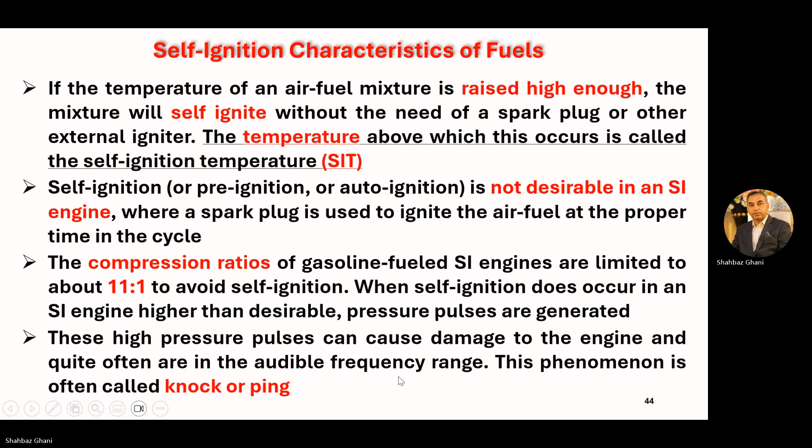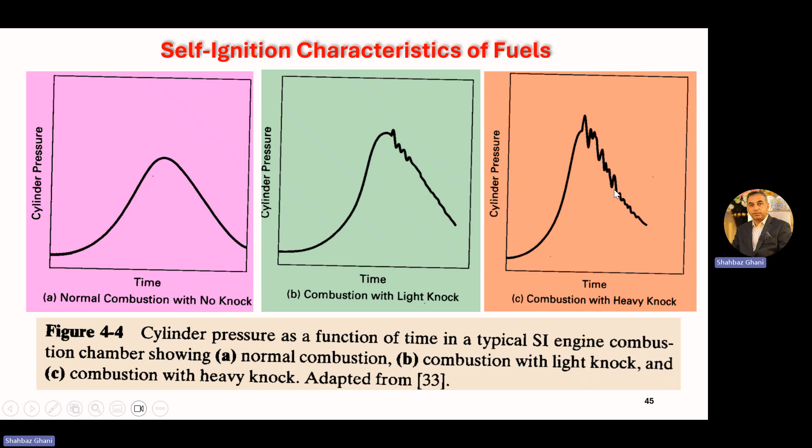Now in the third case, when we have a heavy knock, when we reach the peak pressure, there is quite a huge self-ignition there, and we have pressure pulse generation, and we have a high knock in the cylinder. These are in the audible range, so we can hear a different kind of noise from an engine.

Now, self-ignition characteristics of a fuel. If the temperature of a fuel is raised above the self-ignition temperature, the fuel will spontaneously ignite after a short ignition delay time. The higher above the self-ignition temperature the fuel is heated, the shorter will be the ignition delay. Ignition delay is generally on the order of thousandths of a second.

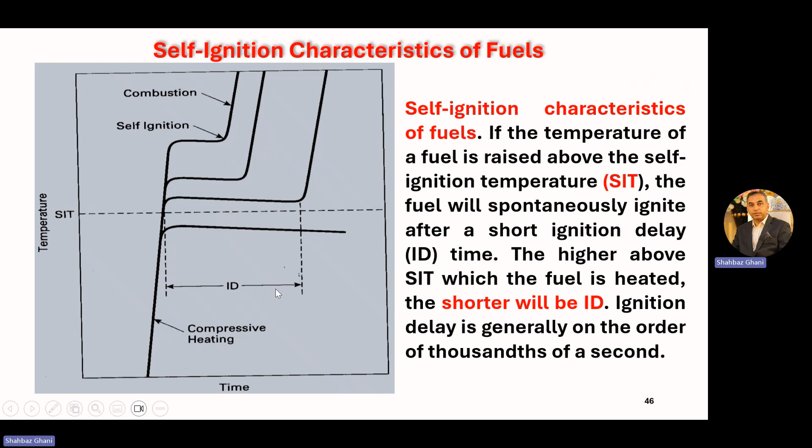Let's see this. We have time here, this is temperature, and this is the self-ignition temperature. Now we have a compression stroke, we have compressive heating here, and when it passes the self-ignition temperature, we have an ignition delay, and then we have combustion. So this is the ignition delay.

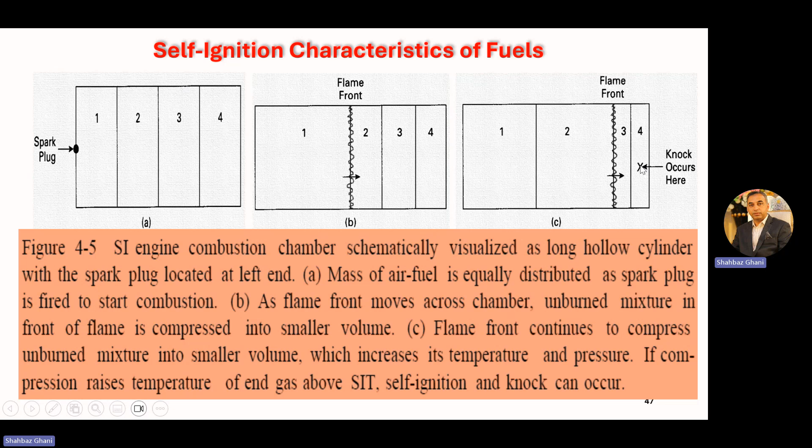So here we have air fuel mixture, air fuel mixture, air fuel mixture. This is burned, and this will now burn this portion, with pressure and temperature exerting in this direction. Now more area, more temperature, more pressure, more force exerting on this compressed air fuel mixture. And when the temperature of this region reaches above the self-ignition temperature, we have self-ignition here and knock occurs in this region.

That was the self-ignition, and there will be some ignition delay, which will be in thousandths of a second.

Now, octane number and engine knock. Octane number is usually for gasoline fuels. Remember this: the fuel property that describes how well a fuel will or will not self-ignite is called the octane number, or just octane. This is a numerical scale generated by comparing the self-ignition characteristics of the fuel to that of a standard fuel in a specific test engine at specific operating conditions.

So this number is not generally given; it is numerically calculated under specific conditions, specific operating conditions, and a specific test bench with specific standard fuels. Then we give this octane rating, the octane number. This is a numerical scale generated by comparing the self-ignition characteristic of the fuel to that of standard fuels in a specific test engine at specific operating conditions.

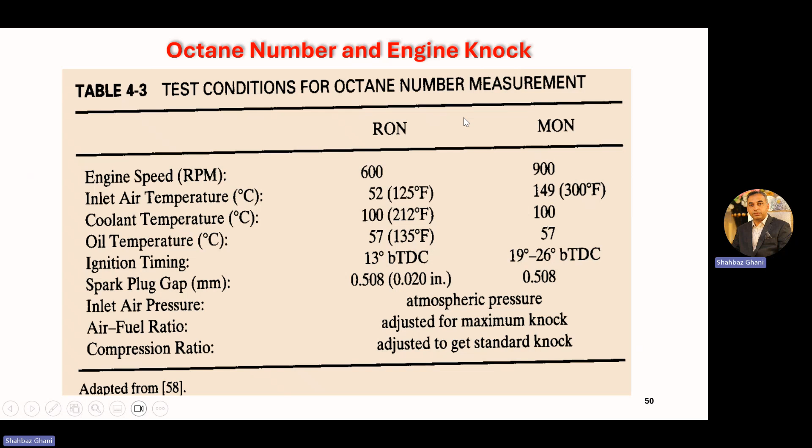Let's see the test procedure to find the octane number of a fuel. The test engine is run at the specified conditions shown in the last slide, using the fuel being tested. We take an unknown fuel, run it under specified conditions, and the compression ratio is adjusted until a standard level of knock is experienced.

At some point we achieve a standard level of knock with this compression ratio adjusted. Then this test fuel is replaced with a mixture of two standard fuels: isooctane and heptane.

The intake system of the engine is designed such that the blend of the two standard fuels can be varied to any percentage, from all isooctane to all N-heptane.

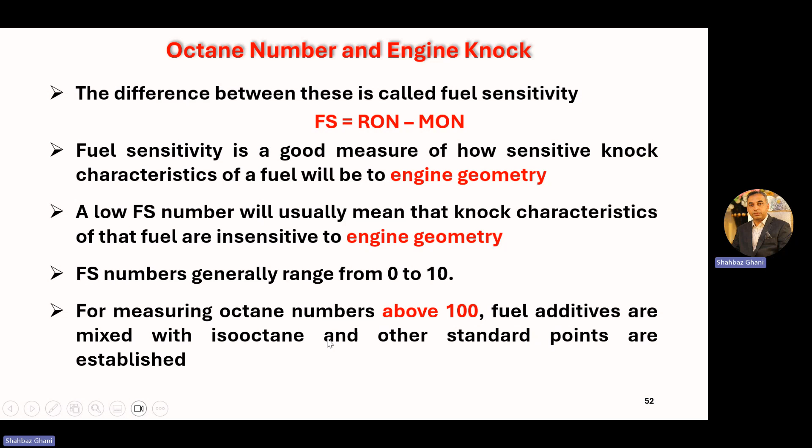Fuel sensitivity generally ranges from 0 to 10. For measuring octane numbers above 100, we have a range from 0 to 100, but to measure octane numbers above 100, fuel additives are mixed with isooctane and other standard points are established.

To obtain an octane number more than 100, a commonly used additive for many years to raise the octane number of fuel was tetraethyl lead, TEL.

Common octane number anti-knock index for gasoline fuel used in automobiles ranges from 87 to 95, with higher values available for special high performance and racing engines, whereas anti-knock index equals RON plus MON divided by 2. Reciprocating SI aircraft engines usually use low lead fuels with octane number in the range of 85 to 100.

If several fuels of known octane number are mixed, a good approximation of the mixture octane number is: octane number mixed equals percentage of A times fuel A's octane number, plus percentage of B times octane number B, plus percentage of C times octane number C, where percent is percent by volume.

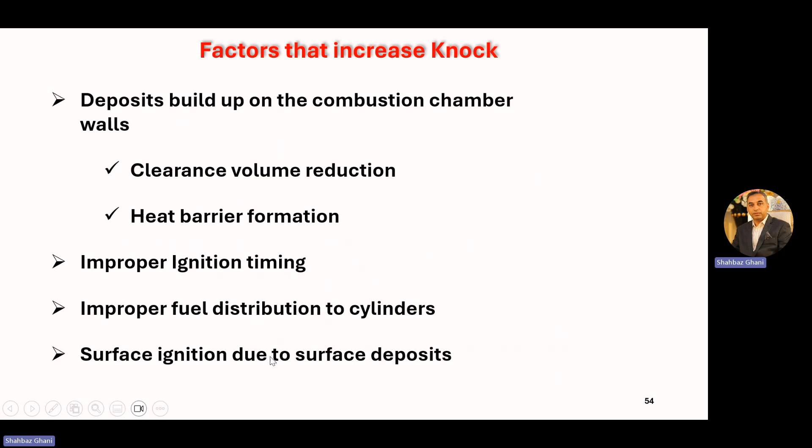The factors that increase knock include deposits building up on the combustion chamber walls during combustion, clearance volume reduction, heat barrier formation, improper ignition timing, improper fuel distribution to the cylinder, and surface ignition due to surface deposits. All these factors lead to increased knock.

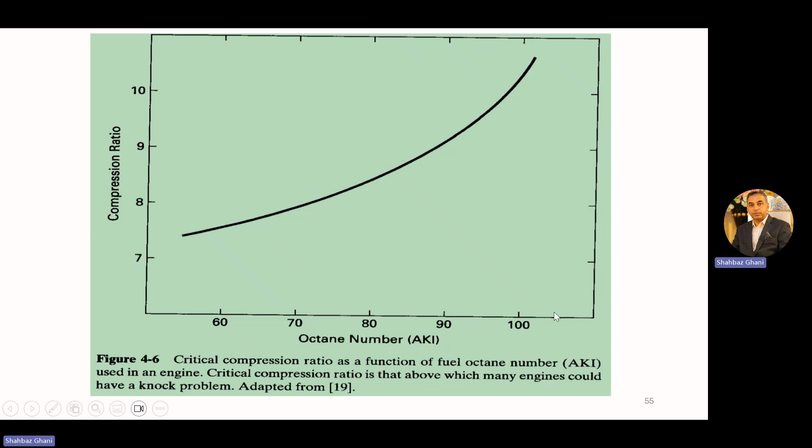Example 4-5: a gasoline type fuel is generated by blending 15% by weight of butene-1, 70% triptane, and 15% isodecane. Determine the anti-knock index, AKI. The anti-knock index is increased if 0.4 grams of tetraethyl lead is added per liter of fuel, and determine if the fuel is sensitive to combustion chamber geometry.

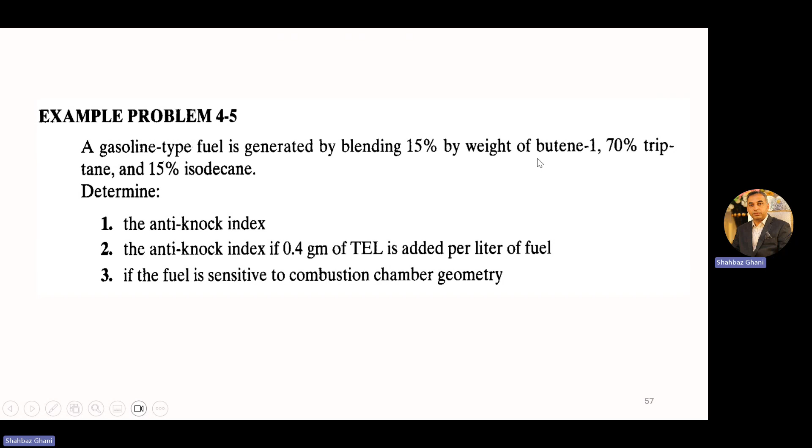Using data from table A2 and the given equation, let's find the research octane number. We know the compression ratio, the percentages of these fuels, and the molecular weights of these fuels.

0.15 times 99 plus 0.70 times 112 plus 0.15 times 113... the research octane number comes out to be 110.2. For motor octane number we get 0.15 times 80 plus 0.70 from the table, giving us a value of 96.5. So the anti-knock index equals MON plus RON divided by 2, which gives an anti-knock index of 103.

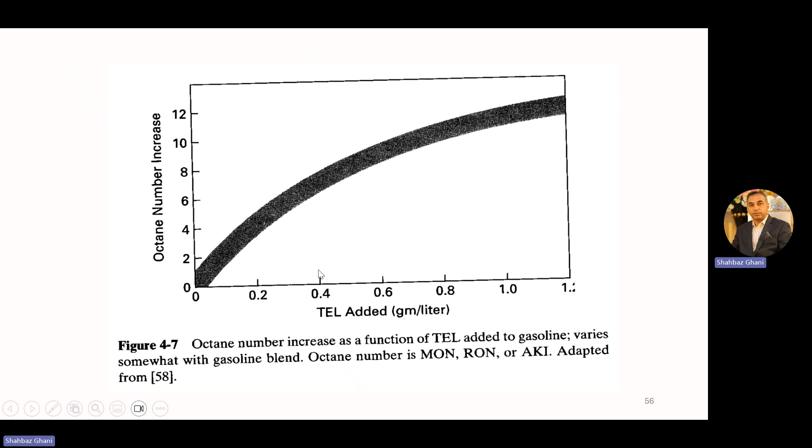Now if we use 0.4 grams per liter, from this graph it will increase the octane number rating by about 7. So 103 plus 7 gives an anti-knock index of 110. Now fuel sensitivity equals RON minus MON, so 110.2 minus 96.5 gives us 13.7, which is more than the range of 0 to 10.

This is a fairly large number, which suggests that the knock characteristics of this fuel are very sensitive to combustion chamber geometry.

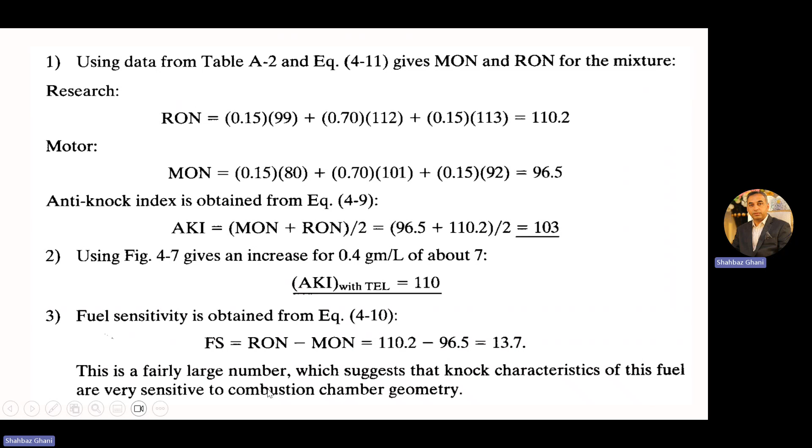Now let's talk about diesel fuel. Diesel oil or fuel oil is obtained over a large range of molecular weights and physical properties. Various methods are used to classify it, some using numerical scales and some designating it for various uses. The greater the refining done on a sample of fuel, the lower its molecular weight, the lower its viscosity, and the greater its cost.

Numerical scales usually range from 1 to 5 or 6, with subcategories using alphabetical letters like A1, 2D, etc. The lowest numbers have the lowest molecular weight and lowest viscosity. Higher numbered fuels are used in residential heating units and industrial furnaces. Fuel with the largest numbers are very viscous and can only be used in large, massive heating units. Each classification has acceptable limits set on various physical properties such as viscosity, flash point, pour point, cetane number, sulfur content, etc.

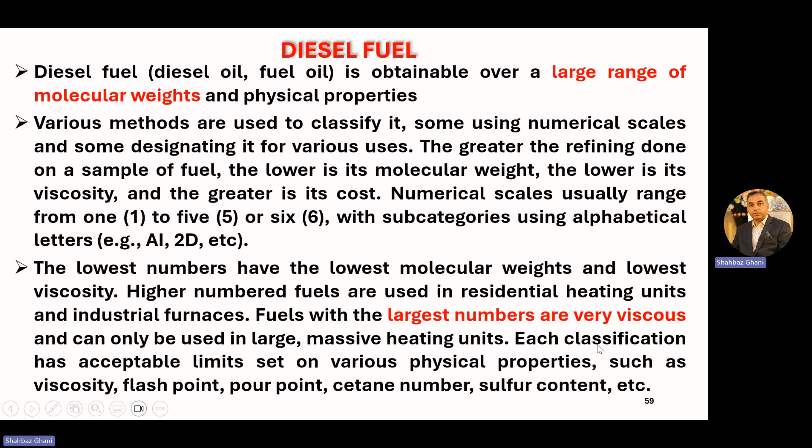Light diesel fuel and heavy diesel fuel are two categories of diesel fuel. Light diesel fuel has a molecular weight of about 170 and can be approximated by the chemical formula C12.3H22.2. We can see from table A2 that light diesel fuel will be less viscous and easier to pump, will generally inject into smaller droplets, and will be more costly.

Because the molecular weight is less. Heavy diesel fuel has a molecular weight of about 200 and can be approximated as C14.6H24.8. Heavy diesel fuel can generally be used in larger or heavier engines with higher injection pressure and heated intake systems. Often an automobile or light truck can use less costly, heavier fuel in summer, but must change to lighter, less viscous fuel in cold weather because of cold starting and fuel line pumping problems.

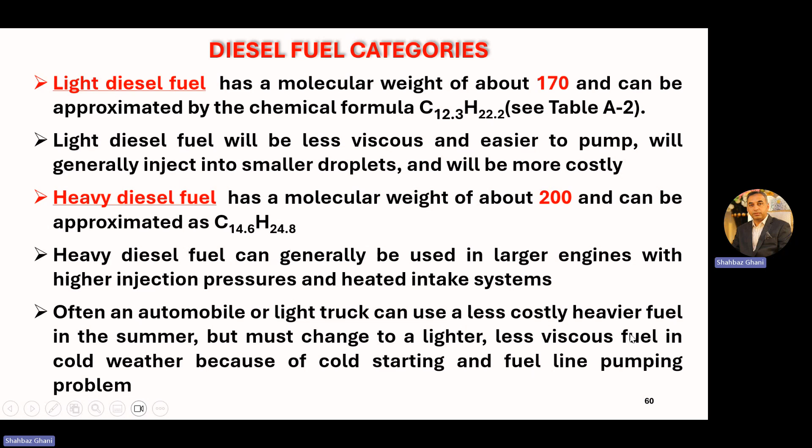So remember this: if you have an automobile or light truck, you can use less costly, heavier fuel in summer. But in winter, we have to switch to the lighter and less viscous fuel because of cold starting and fuel line pumping problems.

Cetane number. In gasoline, we have octane number, but in diesel fuel, we have cetane number. In compression ignition (CI) engines, self-ignition of the air-fuel mixture is a necessity. So we don't have a spark plug in a diesel engine, and we don't have any other ignition mechanism. It is a compression ignition engine in which self-ignition of the air-fuel mixture is a must.

The correct fuel must be chosen which will self-ignite at the precise proper time in the engine cycle. It is therefore necessary to have knowledge and control of the ignition delay time of the fuel. We must know about the properties and characteristics of the fuel and its ignition delay time. The property that quantifies this is called the cetane number.

The larger the cetane number, the shorter the ignition delay. So a diesel fuel having a larger cetane value will have a shorter ignition delay, and the fuel will self-ignite quicker in the combustion chamber environment. A low cetane number means the fuel will have a longer ignition delay.

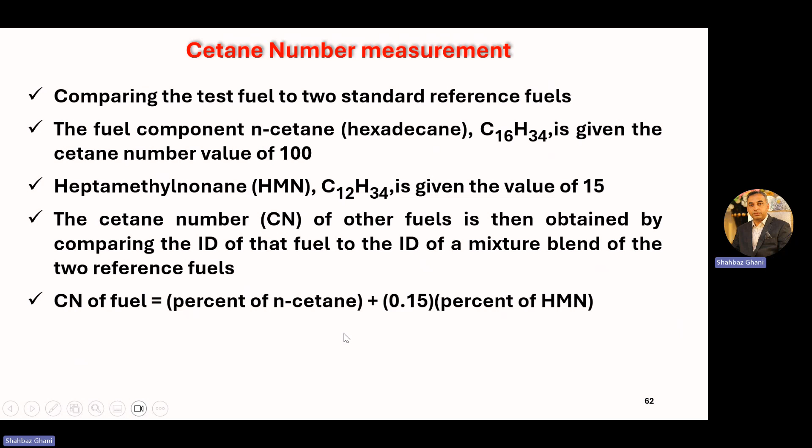The cetane number of a fuel is equal to the percent of N-cetane plus 0.15 times the percent of heptamethylnonane. This is how we can find the cetane number of an unknown fuel.

Cetane number measurement procedure: a special CI test engine, as we have in gasoline with special test conditions, is used. This special CI test engine has the capability of having the compression ratio change as it operates, just as in the gasoline engine where we can change the compression ratio from 3 to 30.

The fuel being rated is injected into the engine cylinder late in the compression stroke, at 13 degrees before TDC. The compression ratio is then varied until combustion starts at TDC, giving an ignition delay of 13 degrees of engine rotation.

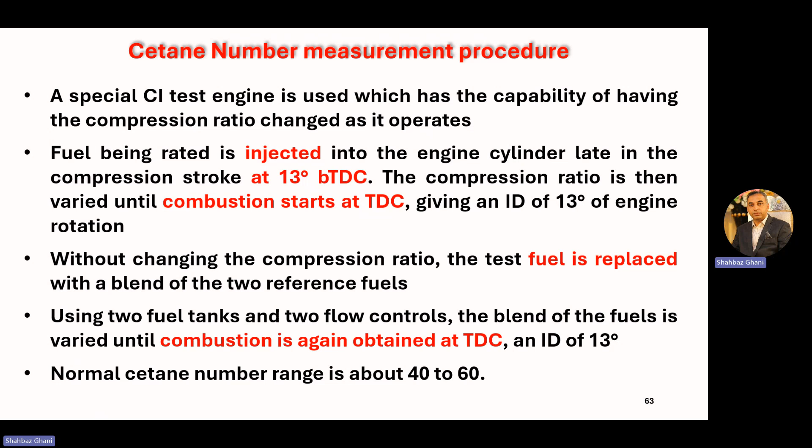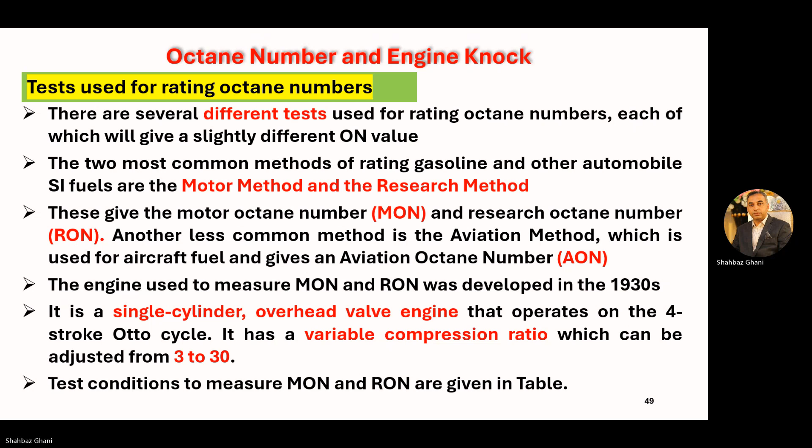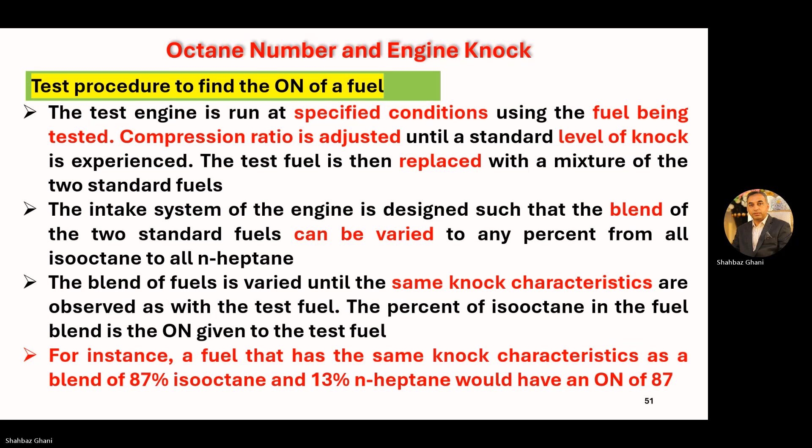Without changing the compression ratio, the test fuel is replaced with a blend of the two reference fuels. Using two fuel tanks and two flow controls, the blend is varied until combustion is again obtained at TDC with an ignition delay of 13 degrees. The normal cetane number range is about 40 to 60, whereas the octane range was 0 to 100.

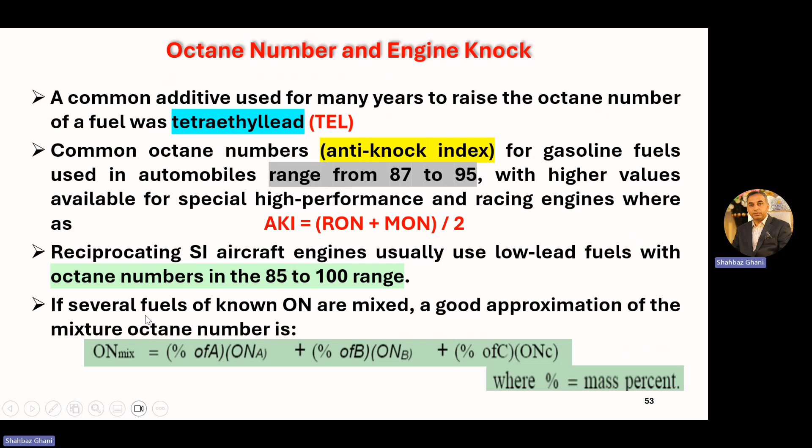Octane range was 87 to 95. But in cetane, we have a range of 40 to 60.

Let's find now a few words regarding alternate fuels. We have studied the gasoline fuels, we have studied the diesel fuel. Now people are working on alternate fuels, alternate sources of energy. The reasons to find alternate fuels are: crude oil and petroleum products will become very scarce and costly to find and produce, emission problems, and foreign trade deficits. So these are the three main reasons to go for alternate fuels.

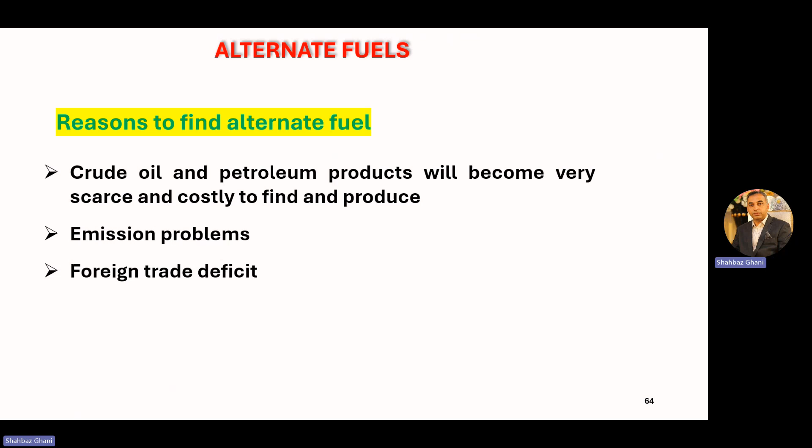Limitations to using alternate fuels: modified engines which were originally designed for gasoline or diesel fuel. Alternate fuels are very costly at present, and there is a lack of distribution points. So these are the limitations in using alternate fuels.

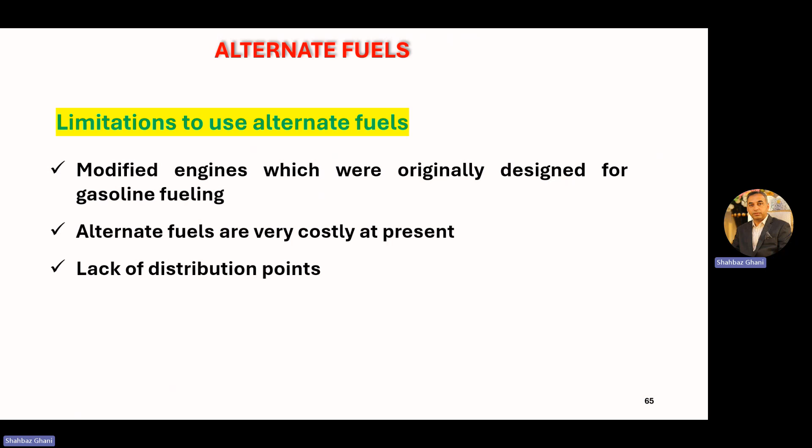Some alternate fuels are alcohols - methanol, ethanol - hydrogen, and natural gas, methane.

The advantages of alcohol as a fuel include: it can be obtained from a number of sources, both natural and manufactured, and is a high octane fuel with an anti-knock index number of over 100 due to high flame speed. So alcohol fuel has a high octane number and anti-knock index above 100. Engines using high octane fuel can run more efficiently by using higher compression ratios, so generally there is less overall emission when compared with gasoline.

When burned, it forms more moles of exhaust, which gives higher pressure and more power in the expansion stroke. It has high evaporative cooling (HFG), which results in a cooler intake process and compression stroke. This raises the volumetric efficiency of the engine and reduces the required work input in the compression stroke.

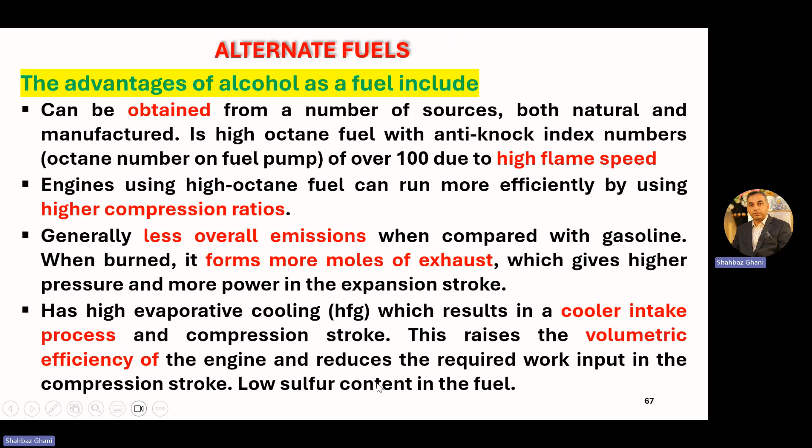Lower sulfur contents are there in the fuel.

Few disadvantages while using alcohol fuels: lower energy content of the fuel, more aldehydes in the exhaust. Alcohol is much more corrosive than gasoline on copper, brass, aluminum, rubber, and many plastics. So this is another disadvantage.

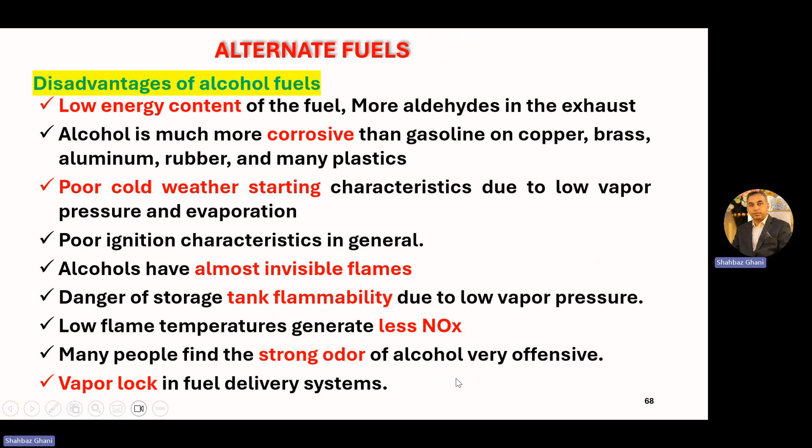Poor cold weather starting characteristics due to low vapor pressure and evaporation. Poor ignition characteristics in general. Alcohol has an almost invisible flame. Danger to storage tank flammability due to low vapor pressure. Low flame temperatures generate less NOx. Many people find the strong odor of alcohol very offensive. Vapor lock in the fuel delivery system. So these are the few limitations or disadvantages while using alcohol fuels.

Now another fuel, hydrogen. The advantages of hydrogen as a fuel: low emissions, essentially no carbon monoxide or hydrocarbon in the exhaust as there is no carbon in the fuel. Most exhaust would be H2O and nitrogen.

Fuel availability - there are a number of different ways of making hydrogen, including electrolysis of water. Fuel leakage to the environment is not a pollutant. High energy content per volume when stored as liquid. This would give a large vehicle range for a given tank fuel capacity.

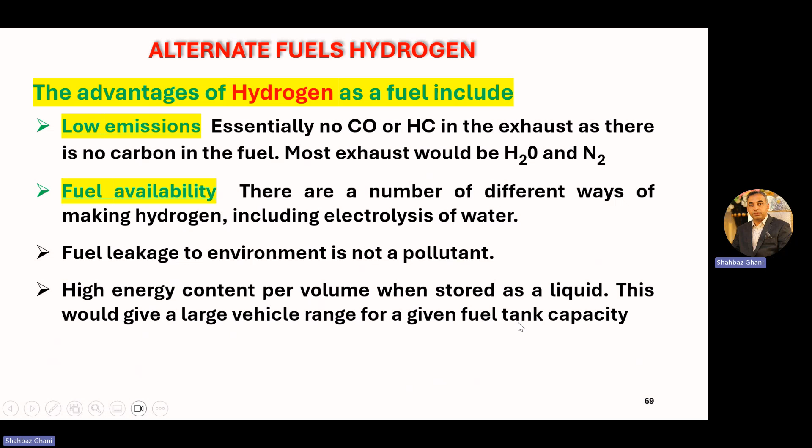Disadvantages of hydrogen fuel: heavy, bulky fuel storage, both in a vehicle and at the service station, difficult to refuel, poor engine volumetric efficiency, fuel cost would be high at present day technology and availability, high NOx emission because of high flame temperature, and it can detonate.

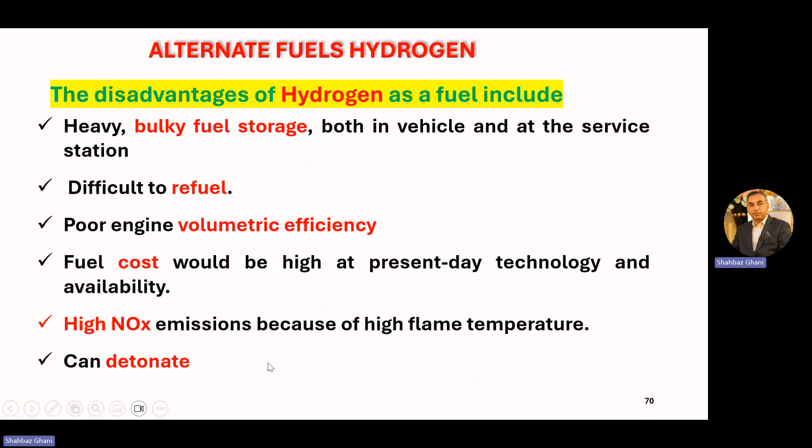Remember this. Now, alternate fuels: natural gas, methane. Natural gas is a mixture of components consisting mainly of methane, 60 to 98%, with a small amount of other hydrocarbon fuel components. In addition, it contains various amounts of nitrogen, carbon dioxide, helium, and traces of other gases.

It is stored as compressed natural gas (CNG) at a pressure of 16 to 25 megapascals, or as liquid natural gas (LNG) at a pressure of 70 to 210 kilopascal, and a temperature of around minus 160 degrees Celsius.

As a fuel, it works best in an engine system with a single throttle body fuel injector. This gives a longer mixing time, which is needed by this fuel.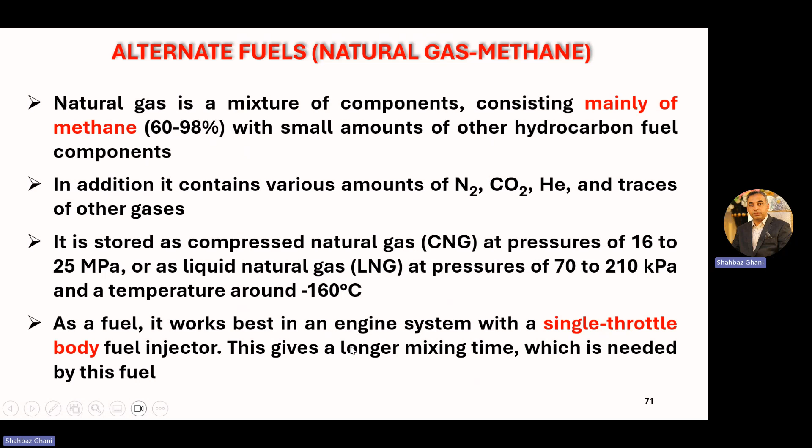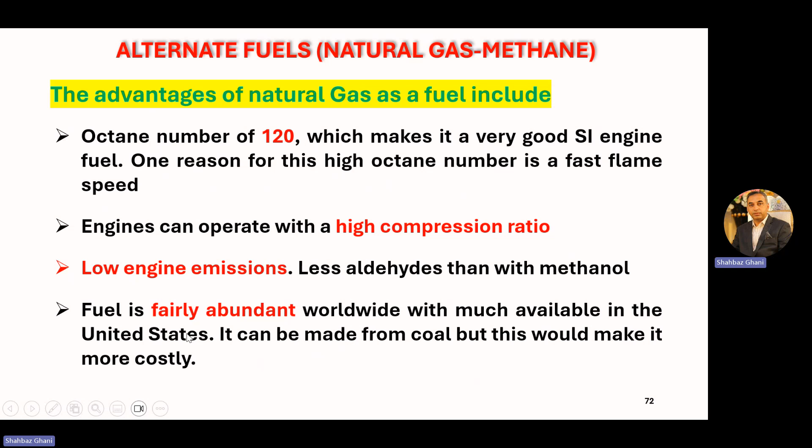The advantages of natural gas are: an octane number of 120, which makes it a very good SI engine fuel. One reason for this high octane number is fast flame speed. The engine can operate with a high compression ratio, has low engine emissions, and less aldehydes than with methanol. Fuel is fairly abundant worldwide, with much available in the United States. It can be made from coal, but this would make it more costly.

Now, a few disadvantages of using natural gas as a fuel: low energy density resulting in low engine performance, low engine volumetric efficiency because it is a gaseous fuel, and the need for a large pressurized fuel storage tank.

Most test vehicles have a range of only 120 miles. There is some safety concern with pressurized fuel tanks. Inconsistent fuel properties, and refueling is a slow process.

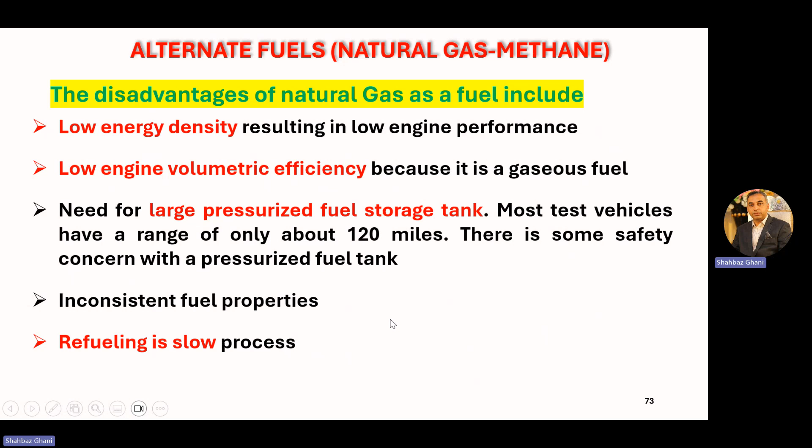So this comes to the end of this lecture. So this completes our chapter 4.